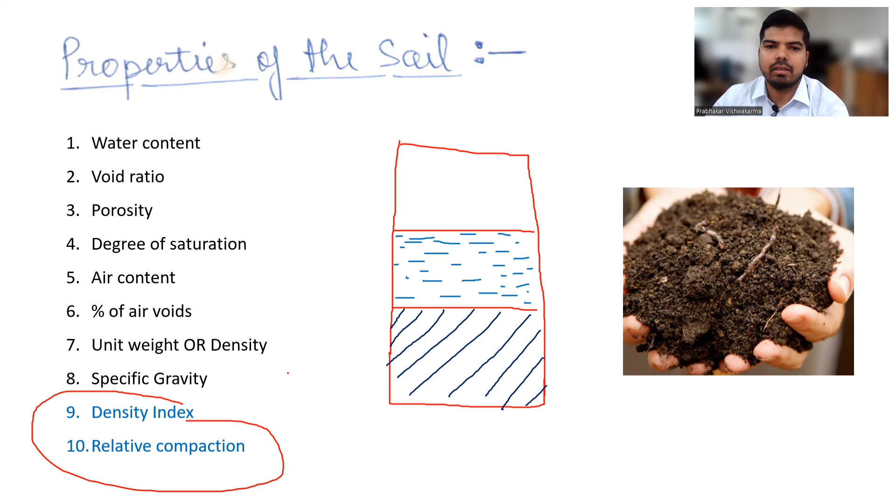So let us begin with density index. This is also known as the relative density, and also as the degree of denseness. The density index represents a property of soil: it indicates the relative compactness of cohesionless soil. It is represented by ID. Sometimes we also represent it with RD, relative density.

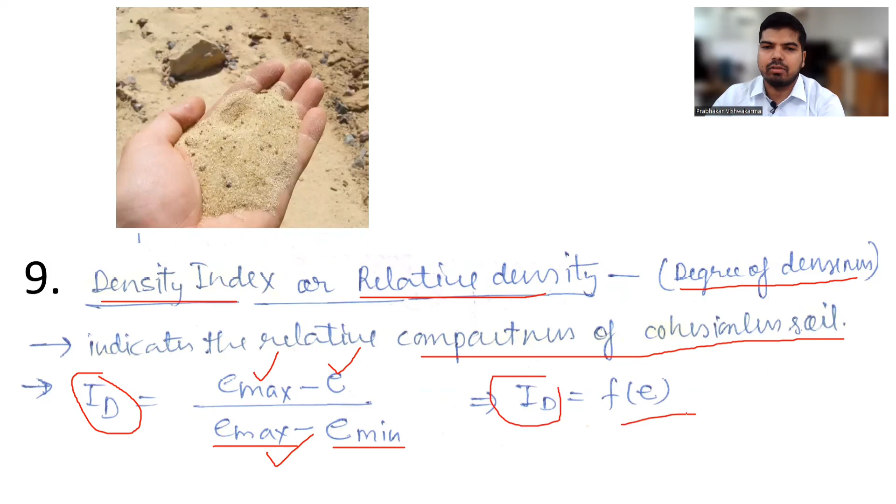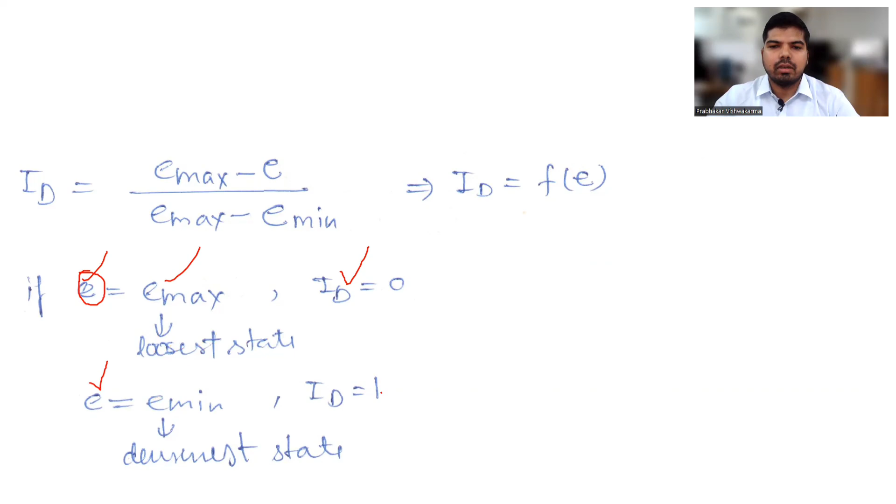This relative density is the ratio of the difference between the maximum void ratio and the void ratio at the natural state, divided by the difference between the maximum void ratio and the minimum void ratio. So relative density is a function of the void ratio. Now, if the void ratio at natural state is equal to the maximum void ratio, then relative density is equal to 0. This represents the loosest state. If the void ratio at natural state is equal to the minimum void ratio, ID is equal to 1. This represents the densest state.

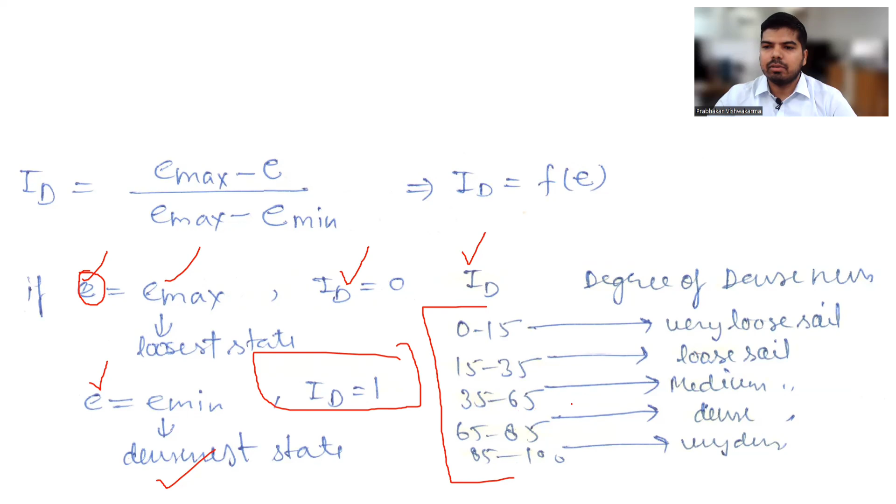Based on the different values of relative density, the degree of denseness is classified here. If ID ranges from 0 to 15, the soil condition is very loose. If 15 to 35, loose soil. If 35 to 65, medium soil. If 65 to 85, dense soil. If 85 to 100, very dense soil.

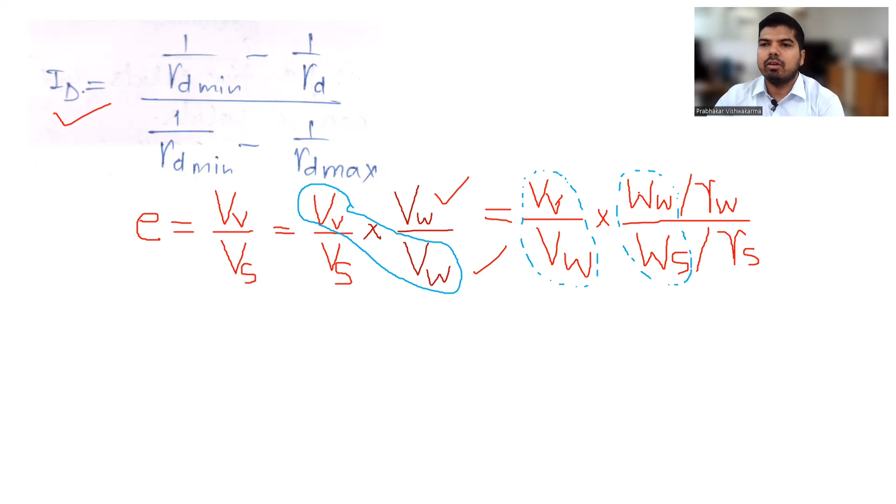Now, this relative density can be expressed in terms of the dry unit weight using this expression. But before that, we will understand how we attain this expression. As we know, void ratio is equal to volume of voids divided by volume of solids. Multiply numerator and denominator by volume of water. This term represents some property of the soil, and the remaining terms VW and VS can be written in terms of weight and unit weight. VW is equal to WW by gamma W, and VS is equal to WS by gamma S.

Volume of water divided by volume of voids is saturation, so this term can be written as 1 by S, this will be the water content, and gamma S by gamma W is equal to GS, specific gravity. If you rearrange, you get E is equal to W GS upon S, where E is void ratio, W is water content, GS is specific gravity, and S is the degree of saturation.

Now, let us understand the relationship between these parameters using the three-phase system diagram. Assume volume of solids is equal to 1. What will be the volume of voids? E is equal to volume of voids divided by volume of solids, and Vs is 1, so E is equal to volume of voids. We also know saturation S is equal to VW upon VV. VV is equal to E, so VW is equal to S into E. If you have difficulty understanding this, go to lectures 2 and 3, where the basic definitions of saturation and void ratio are explained.

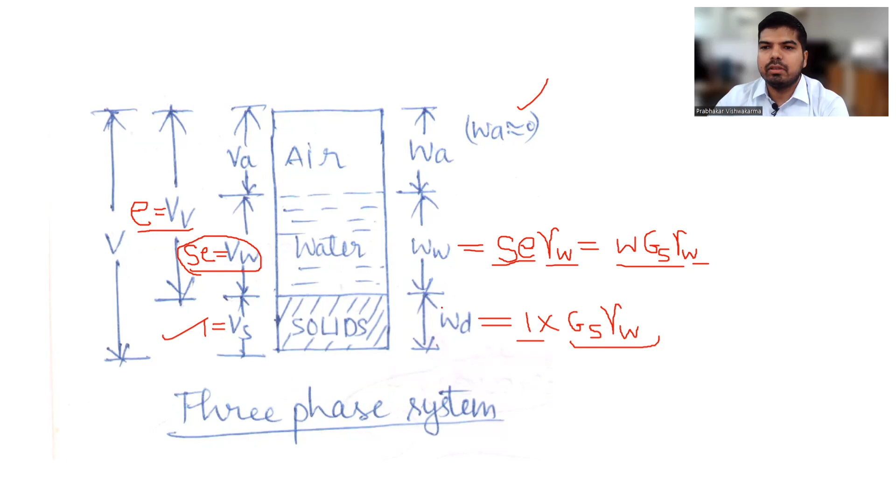Weight of solid is equal to volume of solid into unit weight of solid. So 1 into this, we can write this term like this. Now, this is some representation. We will use these things in the coming content of this lecture.

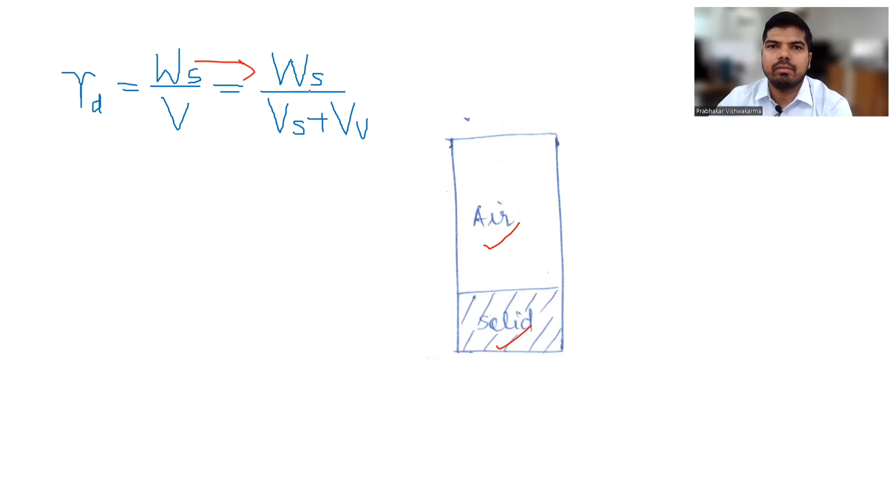Now, here dry unit weight can be expressed as, here we are talking about the two-phase system where solids and air are there. So gamma D is equal to Ws by V. The weight can be written like this, and V total volume is equal to Vs plus Vv. Now here in the two-phase system, volume of solid is equal to 1. So volume of air is equal to e. Weight is 0, and this is the weight of the solid.

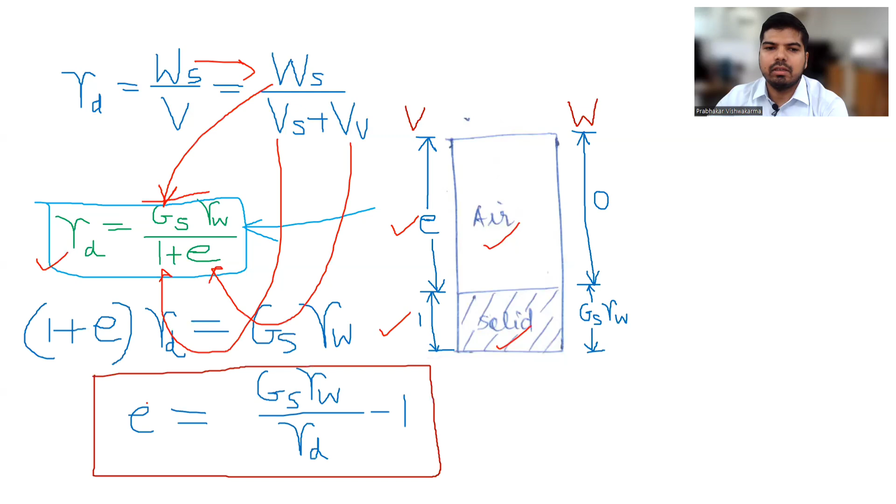So here we can express this weight as Gs gamma W, and this one will be 1, and volume of void is equal to e. So we have this expression. Now, if we arrange the terms of this expression, we have void ratio e is equal to Gs gamma W upon gamma D minus 1. So here you will see this relationship between void ratio and gamma D.

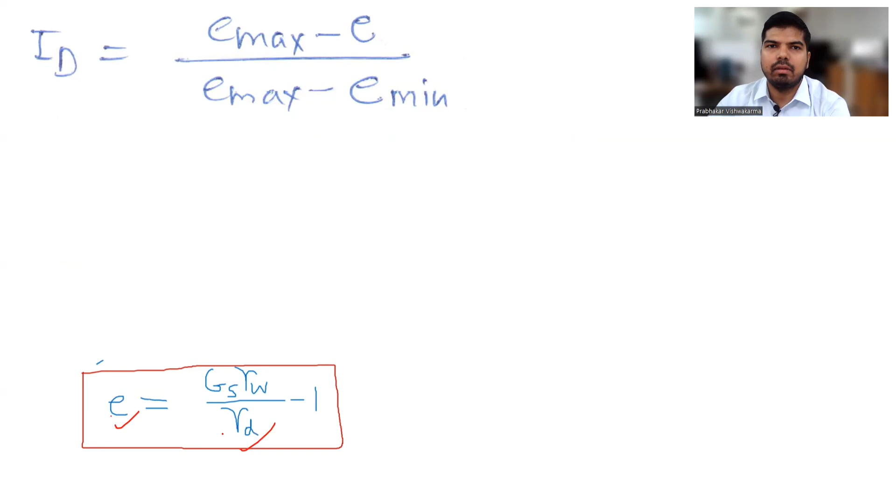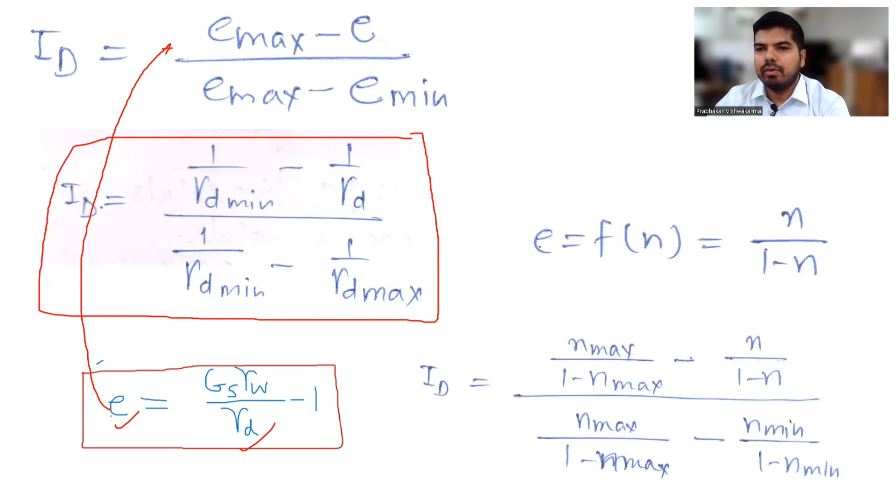So we will use this relationship to represent the ID in terms of the dry unit weight. So for e max, the gamma D will be gamma D min. For e minimum, gamma D maximum. For natural state, gamma D will be natural state. So just replace the e value with this equation. Then we will have this kind of equation where relative density can be expressed in terms of the dry unit weight. Now we also know void ratio is a function of porosity, so we can express ID in terms of the porosity.

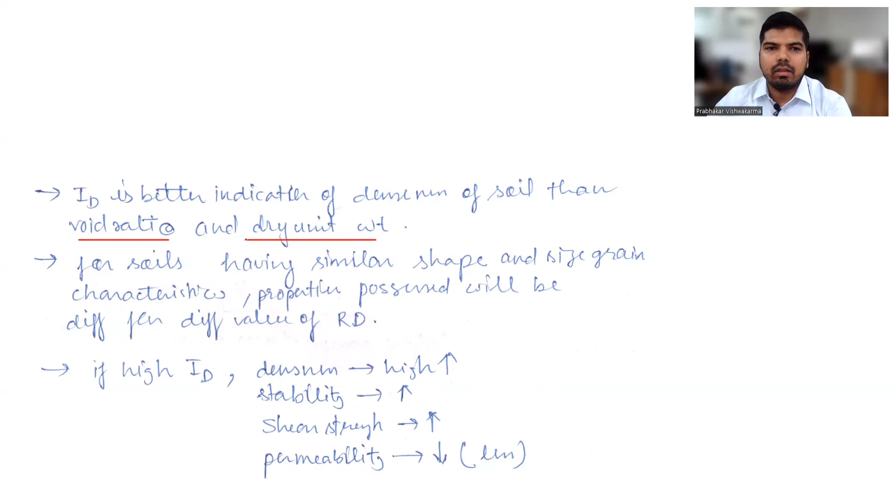From this we understand ID is a better indication of the denseness of soil than the void ratio and dry unit weight. So if you have void ratio and dry unit weight, calculate the ID so that it will represent the better state of the soil. For soil having similar shape and grain size characteristics, properties will be different for different values of RD. So for the same soil, if we have a high ID value, then denseness will be high, stability will be high, shear strength will be high, and permeability will be less.

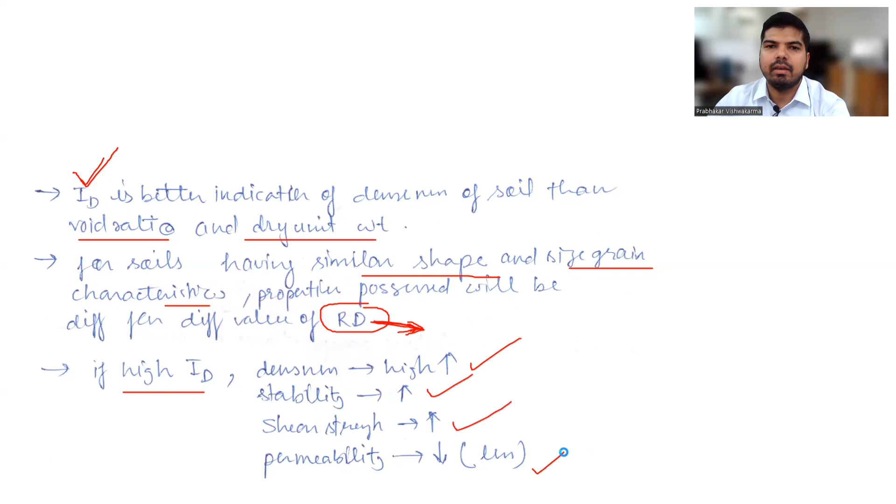Now the next term is the relative compaction. So what is relative compaction? Relative compaction indicates the relative compaction of both cohesive and cohesionless soil, meaning it is applicable for clay and sand also. But RD, relative density, is only applicable for cohesionless soil. It can be expressed as gamma D by gamma D max.

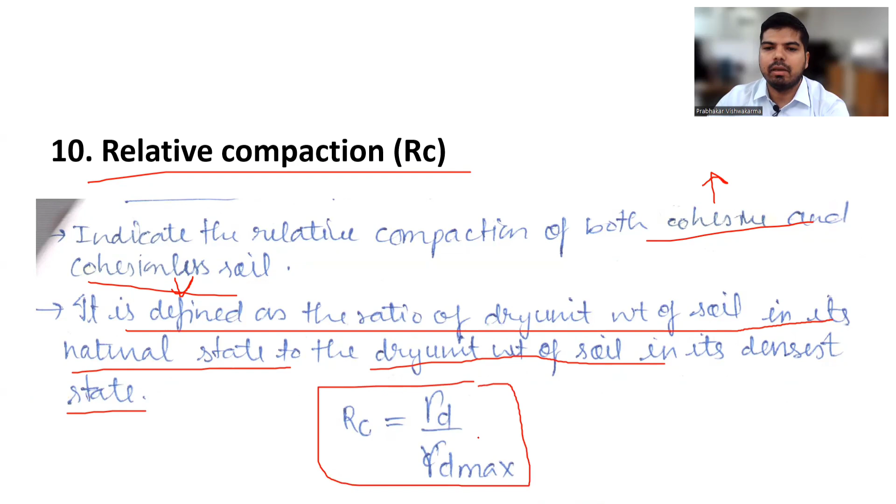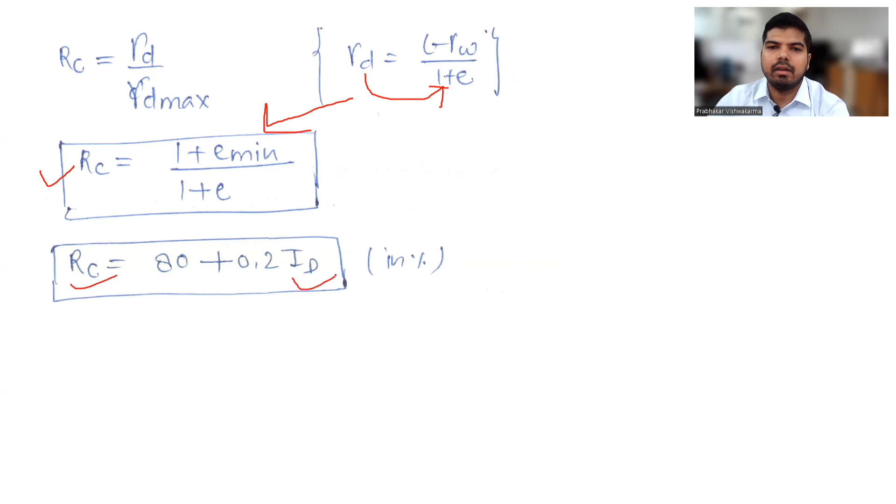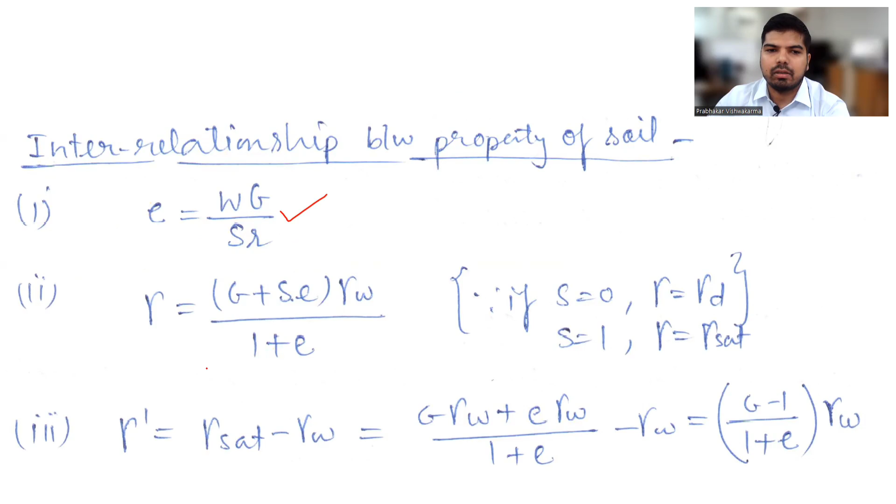So we know this relationship: gamma D is inversely proportional to 1 plus e. So just replace this term. In terms of the void ratio, relative compaction can be rewritten like that. Here is a relationship between relative compaction and relative density: RC is equal to 80 plus 0.2 into ID. There are a few other relationships between the properties of soil, which you can recall for solving numerical problems. Otherwise, if your basic understanding is clear, they can be derived from there.

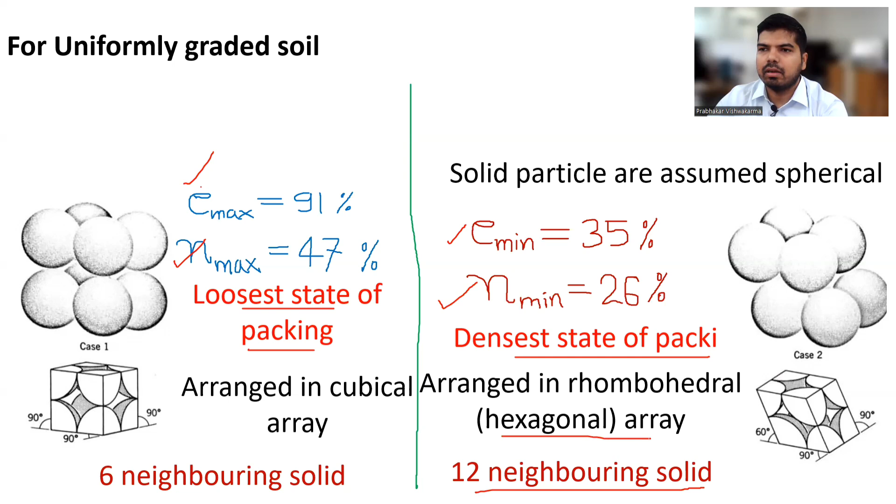So for this lecture, these are the details about relative density and relative compaction. Apart from that, we have also seen some relationships between soil properties, which are helpful for solving numerical examples. Next, we will discuss the consistency of soil. We will talk about the Atterberg limits, which are the liquid limit, plastic limit, and shrinkage limit. We will also see some applications of this topic.